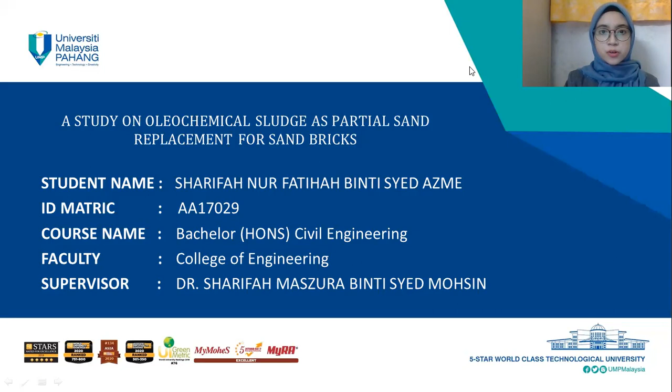Today I would like to present my final year project, which is a study on oleochemical sludge as partial sand replacement for sand brick. First, I would like to present the content of my presentation, including introduction, problem statement, aim and objective, scope of study, significance of study, literature review, methodology, material selection, result and discussion, conclusion, recommendation, and references.

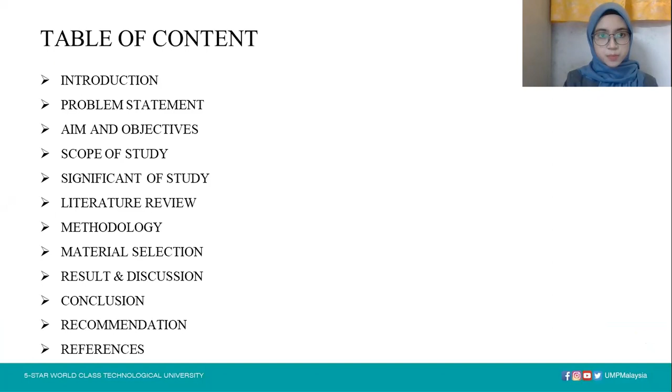For the introduction, I would like to brief about brick, which is one of the materials used in the construction of houses, buildings, drains, bridges, and others. Brick contains many different types in terms of color, shape, quality, and strength according to the material used. In this research, sand cement bricks are used to produce new brick using the material provided.

As I already mentioned in my title, I will study oleochemical sludge as partial sand replacement for sand brick. Oleochemical is the waste that comes from the process of palm tree derived fats and oils, and is usually contained in shampoo, soaps, and others.

The popularity of oleochemical products is increasing, particularly due to the fact that the raw material of this industry is from renewable sources. Due to this property, they produce a lot of oleochemical sludge, which I use in my research to replace material in my brick production, which is sand.

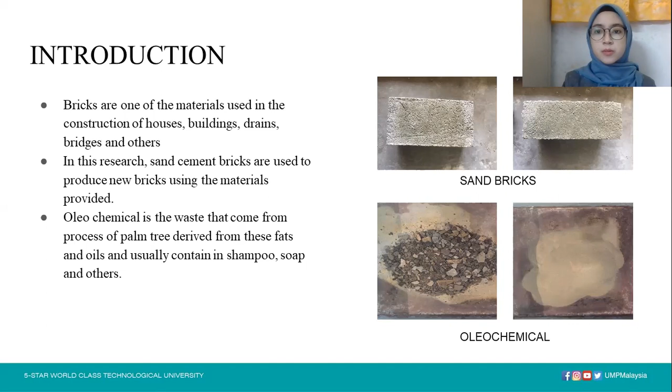Now I would like to proceed to the next slide, which is problem statement. The first problem statement is that the price of manufacturing bricks increased due to the shortage of natural sand in Malaysia. The high demand from the current society makes the country more developed in terms of development, by constructing more buildings in the future, so that brick sellers or suppliers will increase the price of the brick itself if the supply of natural sand to produce more brick is limited.

The next problem statement is environmental issues related to sand mining. Sand mining causes destruction of the environment. Environmental problems occur when the rate of extraction of sand material exceeds the rate at which natural processes generate this material.

In the oleochemical industry, the process waste needs to be treated before discharge, even though the material is considered environmentally friendly. When the waste from the factory is released, it will be thrown and placed at the landfill. So to avoid filling the landfill with waste, it can be used for a better solution in the construction industry.

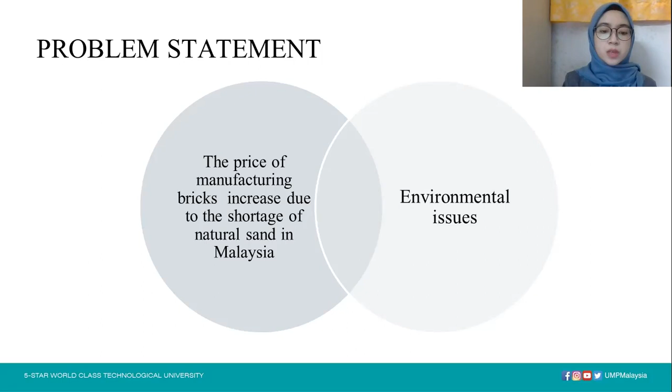Then I would like to proceed with the next slide, which is objective. The overall aim of the research is to investigate the performance of oleochemical sludge in brick production when the waste replaces the sand during manufacturing of brick, and its potential to produce quality brick using the waste material of oleochemical.

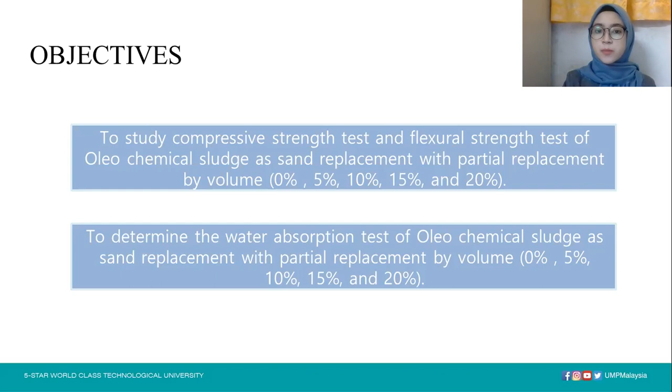The specific objectives of the present work are to study the compressive strength test and flexural strength test of oleochemical sludge as sand replacement with partial replacement by volume of 0%, 5%, 10%, 15%, and 20%. The second objective is to determine the water absorption test of oleochemical sludge as sand replacement with the same partial replacement by volume.

Next is the scope of the study, including the sample of sludge that was taken from the FPG oleochemical industry at Gebeng, Pahang.

The compressive strength test has 3 samples tested on day 7 and 3 samples tested on day 28, each with partial replacement by volume. Next is the flexural strength test, also with 3 samples tested on day 7 and 3 samples tested on day 28, each with the same 5 partial replacements by volume as mentioned before.

Then the last test is the water absorption test, which only needs to be tested on day 28, meaning 3 samples are needed, each with 5 partial replacements by volume also.

Overall, the tests that need to be conducted are 75 samples. The size of the mold follows JKR standard 2014, which is 113 millimeters by 225 millimeters by 75 millimeters. All the tests will be conducted at the laboratory of University Malaysia Pahang.

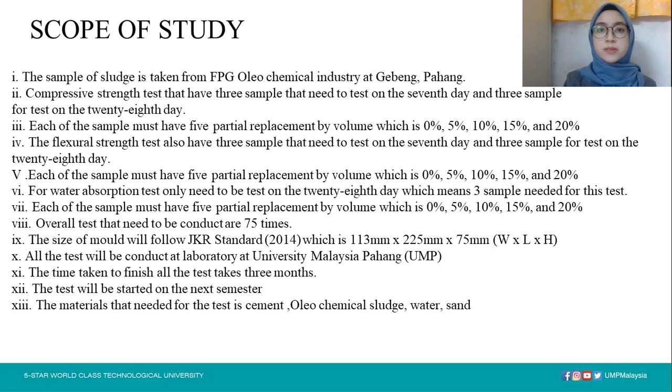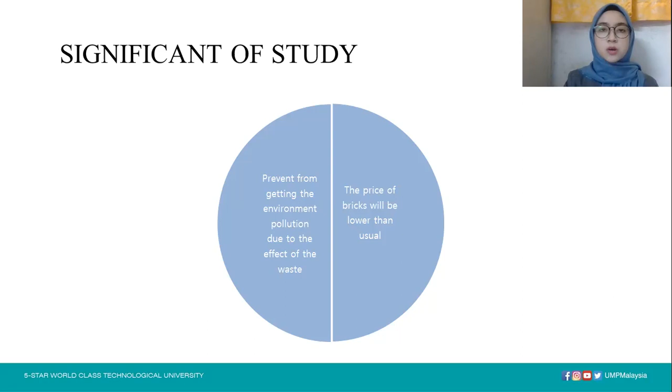Second is the price of brick will be lower than usual. So it will give benefits for the consumer and user, and also to the society. This ought to be a pivotal step in the development of the construction industry to be more advanced.

Now I will proceed to the literature review, from author Kitsurin, that says they developed a new approach in making brick from 100% lime fly ash. The fly ash brick developed in the study shows superior mechanical strength, especially compressive strength, compared with red fired clay brick, facing brick, and other types of fly ash bricks.

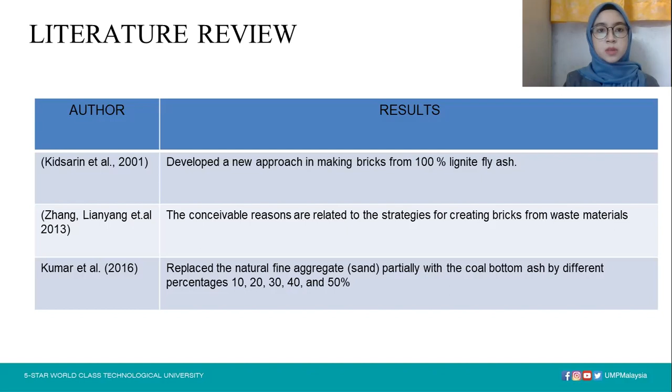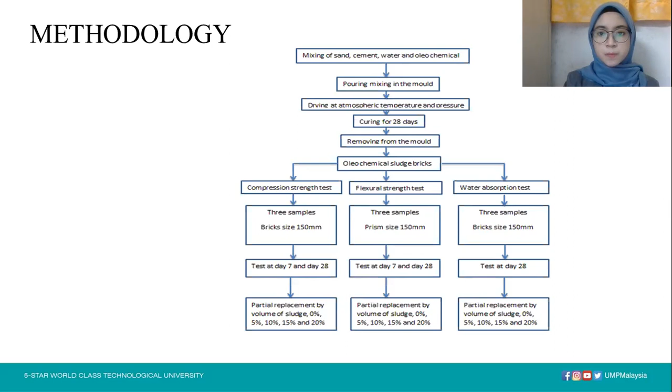Before pouring the mix into the mold, we must apply oil to each surface of the mold so that the mixture does not stick to the mold. Then curing for 7 and 28 days. After that, we can start testing.

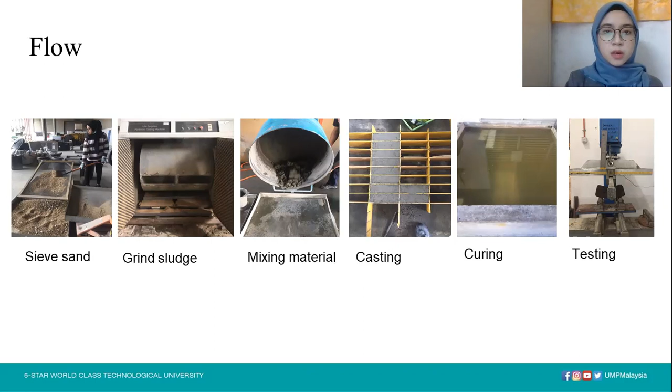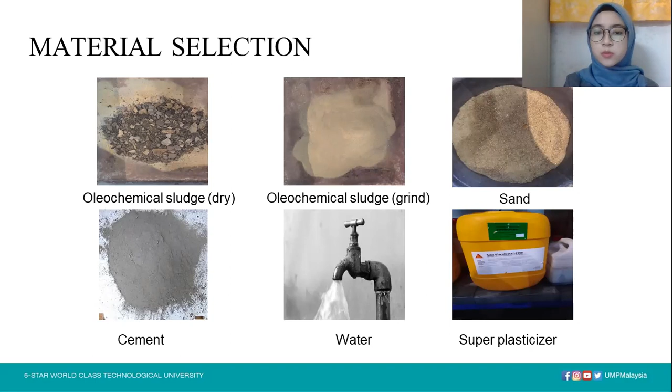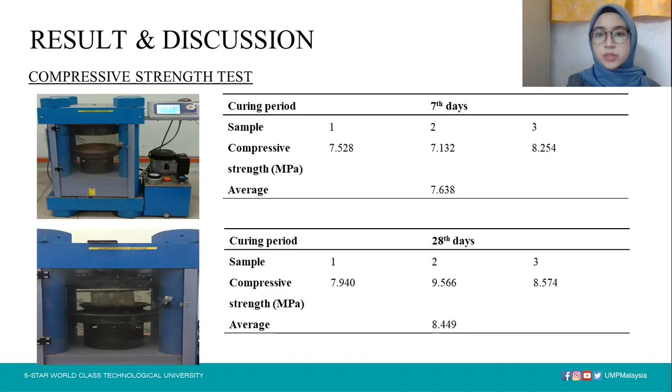Now we will go to the important part, which is result and discussion. First is compressive strength test. Based on the slide, we can see the three samples which we took for each percentage. From this slide, this is for 0% replacement for day 7 and also day 28. We also take the average of each three samples.

Now we can see the control result for different testing days. It showed an increasing pattern as more days are taken: at day 7, I get 7.638 megapascal, and at day 28, 8.449 megapascal. So it showed that the same mix design at different days taken increases in strength.

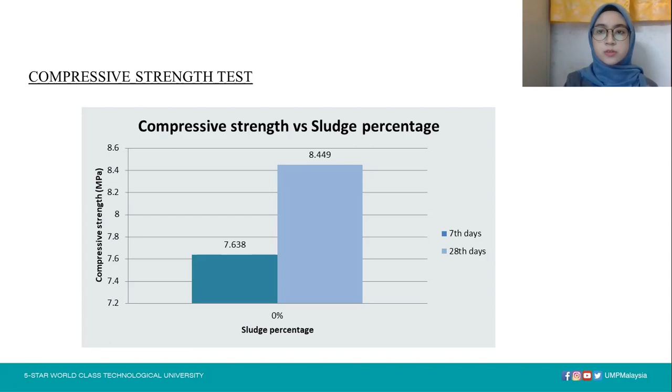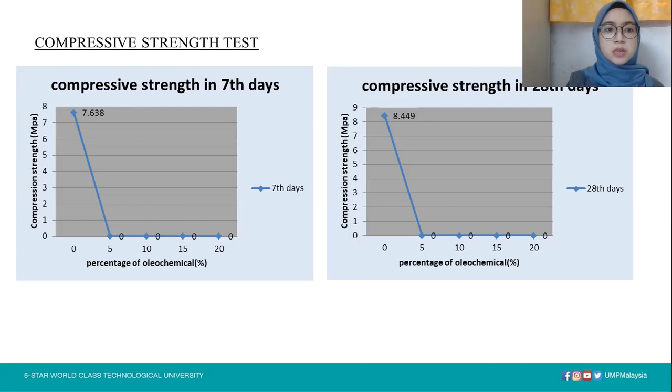Now, the graph in this slide is with the same day but different mix designs, which are 5%, 10%, 15%, and also 20%. But there's no value except for 0%, which is the control value. The trial and error was conducted using 10% replacement until the mix design was acceptable, to proceed with other percentages.

The 10% trial and error mix design could be used for compressive strength tests after casting and curing, but the testing did not come up with a value. So the compressive strength test for 10% sludge replacement failed. Then casting and curing were also conducted for 15% and 20%, but ended up failing during the curing process. Using the same mix design for 5% sludge replacement, the result also could not be obtained.

Due to the MCO problem, the test could not be proceeded until getting the result, especially for the target that needed to pass 10% replacement. As a result, the 10% acceptable process could not be continued.

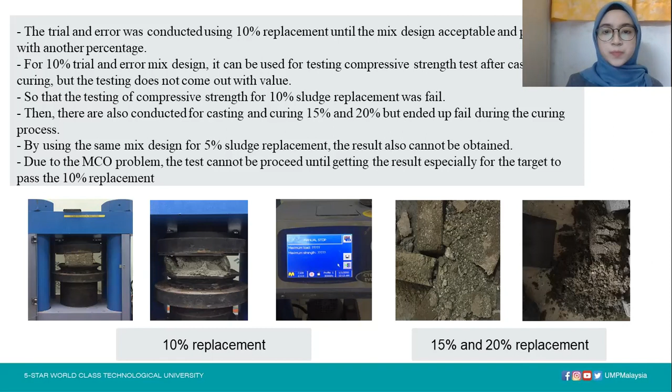This is for the flexural strength test. Same as before, for the flexural strength test, I obtained results for the control, zero replacement. There are 3 samples for 7 days and 3 samples for 28 days, and the average is taken.

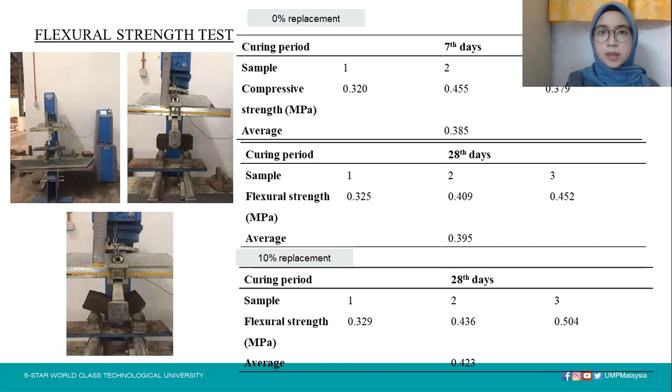For the flexural strength test, the 10% replacement average at 28 days is 0.423 megapascal. For 7 days, the 10% replacement could not be obtained because we could not enter the lab due to the MCO problem. Now we proceed to the flexural strength test chart, which we can see here.

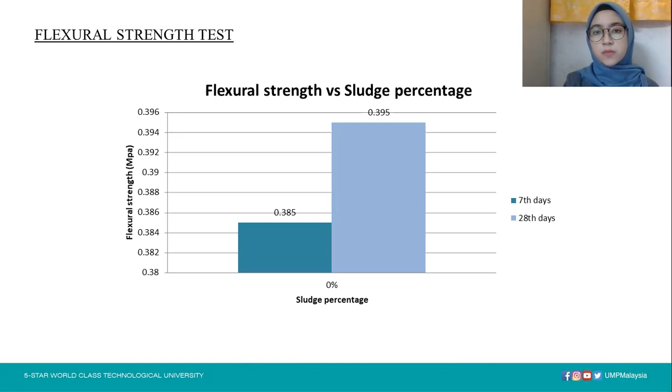This is for the 0%. The flexural strength increased from 7 days to 28 days. For 7 days it is 0.385 megapascal, and for 28 days, 0.395 megapascal. This is the chart for the flexural strength. For the 10% percentage, we got 0.423 megapascal at 28 days.

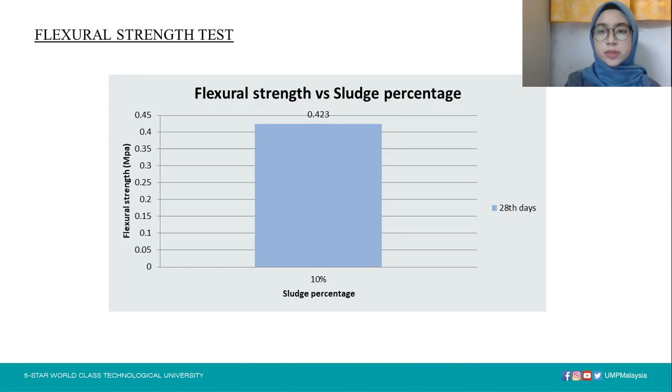This is for the flexural strength test, where we can see the difference from compression. We got the result for the 10%. So, for the flexural strength test, when comparing 0% to 10%, there is a decrease between these two percentages. So, the oleochemical replacement actually does not give strength to the brick samples.

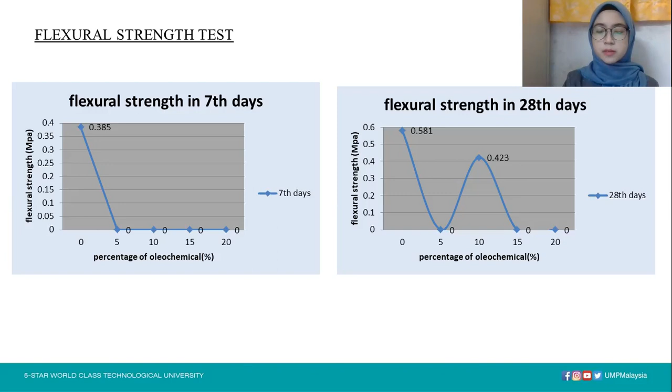Okay, the flexural strength also faced the same problem as the compression test before. Trial and error was conducted using 10% until the mix design was set, so we could proceed with other percentages. The 10% trial and error mix design could be used for the compression test after curing. There are values provided from this trial, as we can see from the slide before.

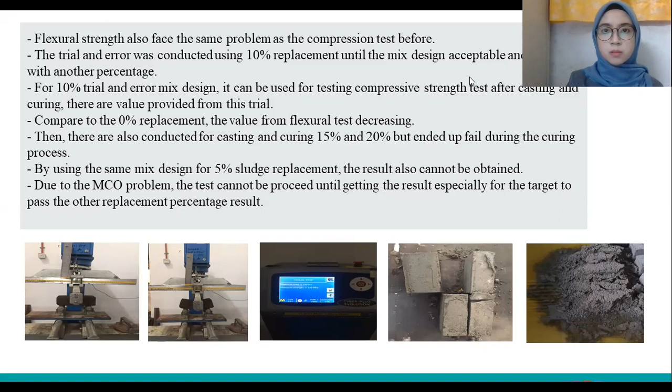Then, using the same mix design for 5% sludge replacement, the result could not be obtained. It was also conducted for 15 and 20%, but ended up failing during the curing process, as we can see from the diagram below. As I mentioned before, the brick condition is too fragile and does not have enough strength because of the oleochemical. As explained before, the oleochemical is too dry, making the brick dry and more fragile.

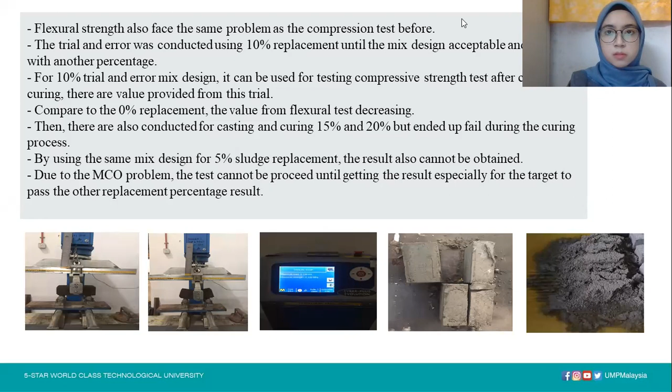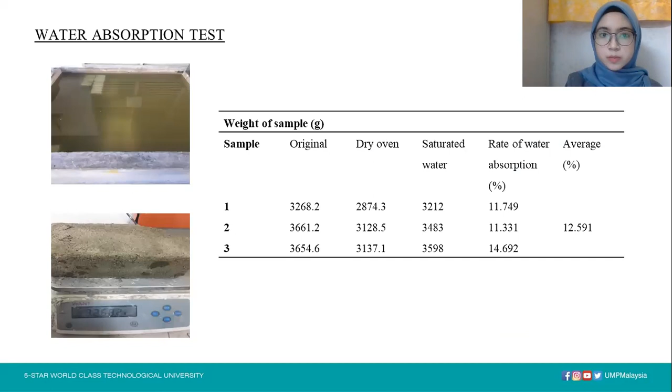Next, the last test is the water absorption test. For the water absorption test, there is only 0%, and we have the original weight, oven dry, saturated water weight, and lastly the average. This is the oven dry process. From water absorption versus sludge percentage, for 0% sludge we get 12.591%.

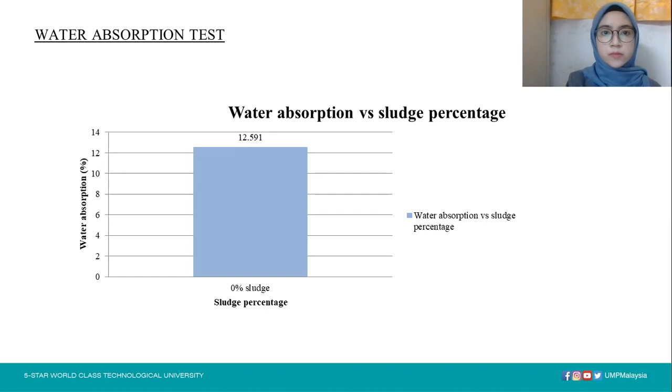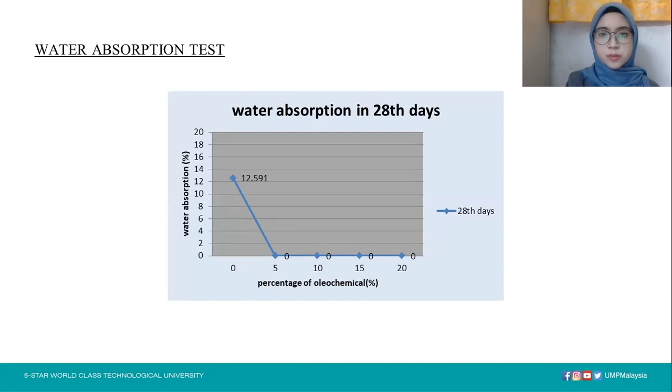For the other percentages of oleochemical, we can see that there is no value for the other replacement percentages. This is because the curing and casting process could not be conducted due to the failed replacement. No values are recorded for those percentages; only the control value for water absorption could be obtained because of the MCO problems.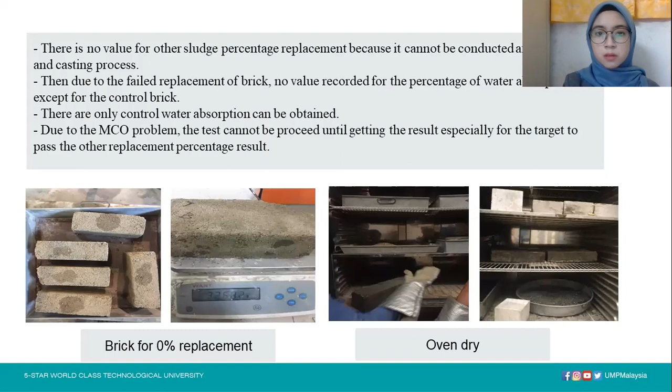Now, I would like to conclude my research presentation. In conclusion, based on the results of the compressive strength test, only the control result could be obtained and could not be compared to the other replacement percentages, 5%, 15%, and 20%, because no values were acquired due to failure at the 10% trial target. For the flexural strength test, the strength decreased when comparing the control and 10% replacement, while the other replacement percentages failed during the curing process.

For the water absorption test, only control results were obtained due to the Malaysian government movement control order problem that did not allow students to enter the laboratory. Testing could not be performed and the objective was not achieved.

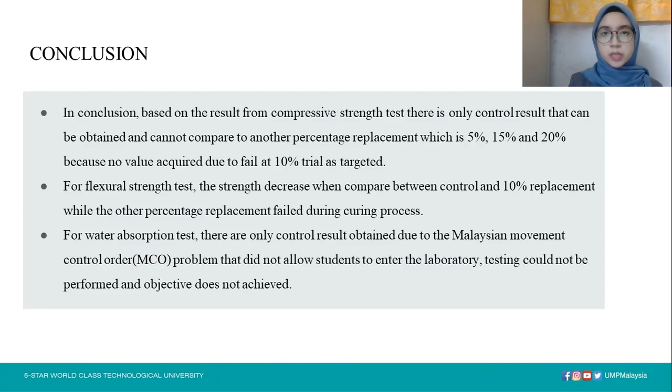The recommendation for the present and future work: since sludge cannot be used at 10% replacement, use a lower percentage for the trial and error so that with oleochemical sludge, better results and accurate findings can be obtained. Second, increase the water cement ratio in the brick mixture to avoid the sample being easily fragile due to the dry condition.